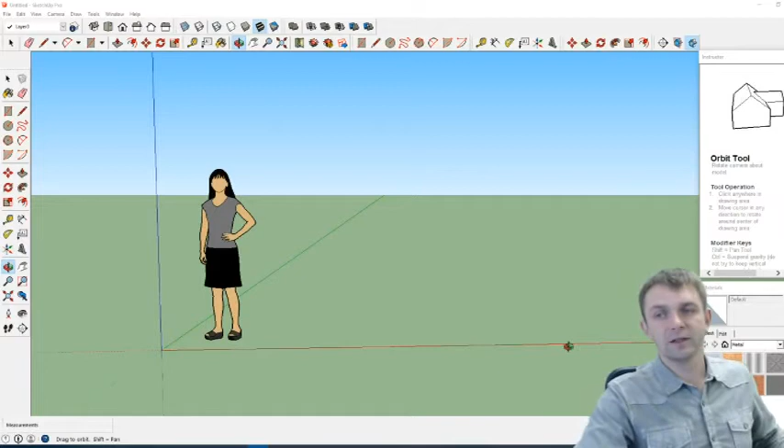So let's start by looking at my measurements, starting with the original floor plan. It's also very recommended to use shortcuts, so you can prepare those in your SketchUp file, but I can do it all manually too.

What I'm using right now is the orbit tool, which gives me the ability to turn the space around, and it's located right here. Now if I want to draw a line, I just press L and it gives me a little pencil. So this is 35 inches. As you see, the line appears in green, so I'm drawing on this elevation, and it's 35 inches.

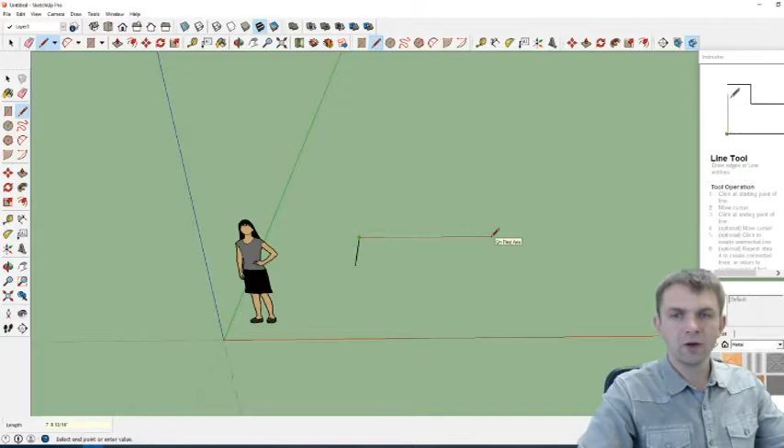Then I'm going 120 inches this way, click, and I want it in red, so you see the line appears in red. If I go up, you see it's blue, now it's green, and I want to go this way. So again, we're working in 3D space. This is 120 - sorry, this is 77. This is basically how much I have to the sides.

Then I have a 60-inch door and another 17 inches to the wall, and then we have a room going this way. I'd have to add this up, so it's 17 plus 14 plus 14 plus 14, so 59, about 66 inches, and it's a 6-inch wall.

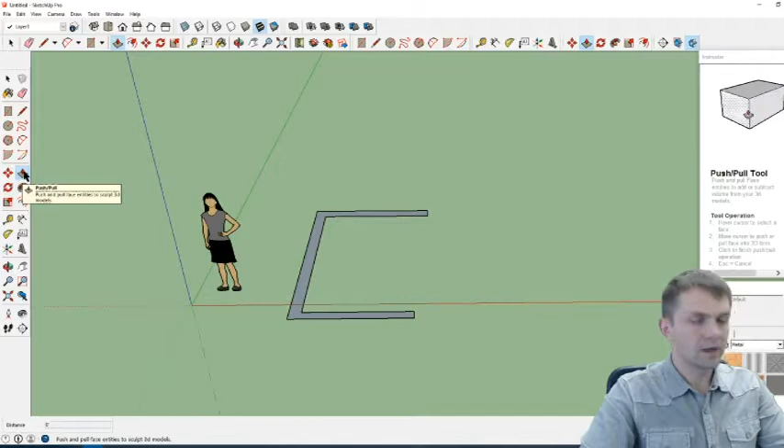Now I want to make myself a little outline here, and sometimes it'll even let you snap parallel to the area you're working in. So now this is our floor plan - it's cool. We press P for pull, which is basically this icon right here. So you go, and the height I have - my total height is 96 - so I got that.

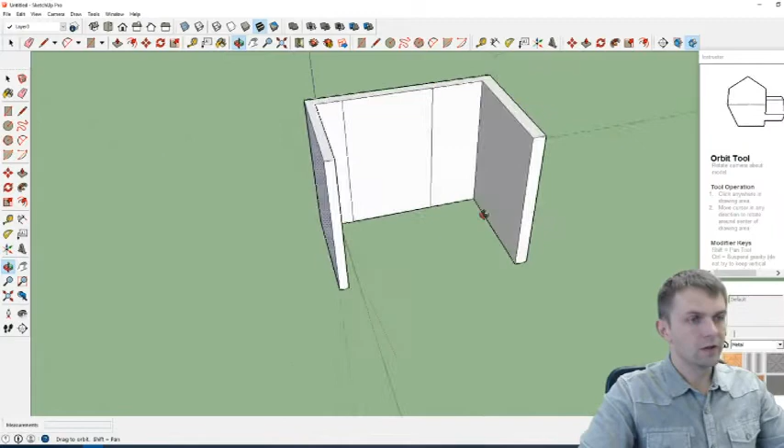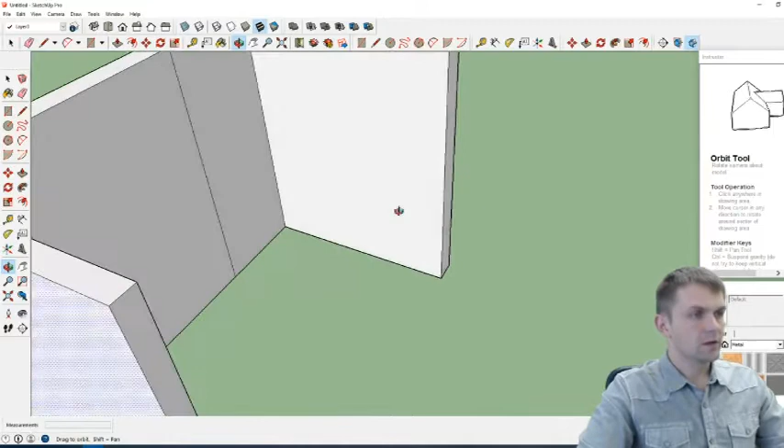So just to give you an idea of the space, basically this is what we're working with. We have the door, the bulkhead, and they want to come up with some design for this space - they want storage for shoes, jackets, and everything else. So we have the space, we have the measurements. Now there's also a bulkhead above this.

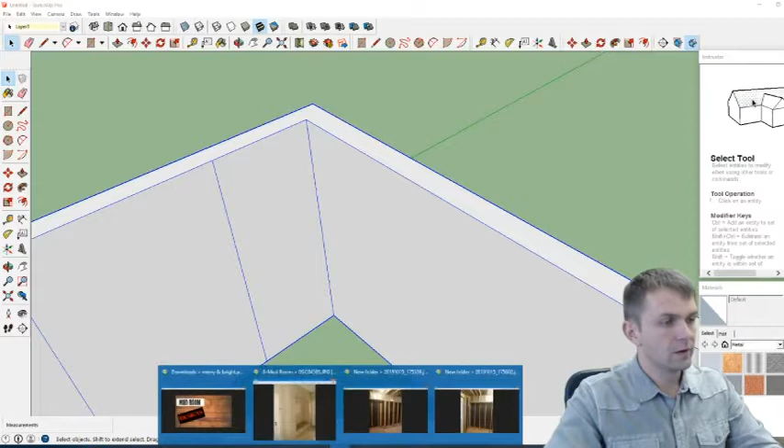What I love to do, and really recommend for everybody, is to make everything in blocks - it's much easier to modify things. So this wall is basically just continuing this way. But what we do have - if I triple click on this, right click, and make a group, now this is its own separate block, so nothing is going to happen to it. I cannot modify it, it's not going to stretch, it's basically frozen. I'm going to add a bulkhead - it's 96 minus 79, so it's a 17-inch bulkhead that we saw in the picture. So 17 inches down and 12 inches in.

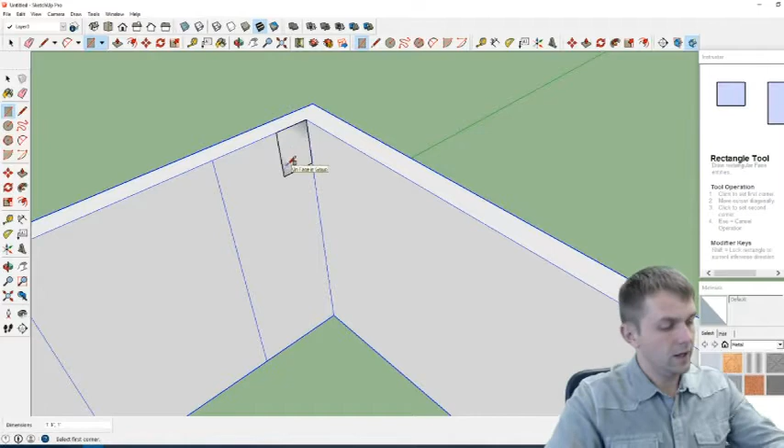So L again for line or pencil, it's 12 inches deep, 17 inches down. Now I usually like shortcuts, so I press R for rectangle and select this, and this space is full, it's 79 inches. So this bulkhead, and again I triple click, make a group. So this is my fixed block, and now I have two blocks, this and that, and this cannot be moved.

So this is where our wall ends. Basically we have the wall. This wall, the client is open to ideas, so he can extend the wall further that way, so he can cut off some of these 2x4s. He just wants a nice design and lots of storage.

So let's go back. Basically, first thing we want to do is make it look tall. If you double click on this, let's say we have an 82-inch door. So you see it gives us a green point, and then E for erase, I can erase these points. So we got our door. You could actually go in SketchUp and find all kinds of models and place a door, but for this, it's just a quick tutorial.

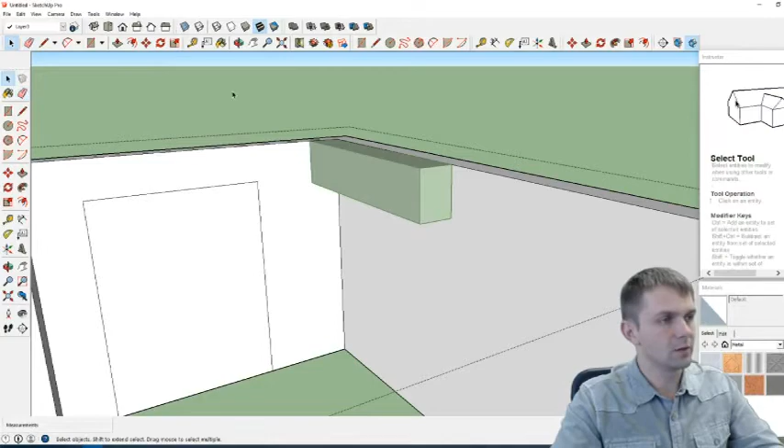We're gonna do a quick drawing of this. I'm doing a 24-inch pantry, so 24, and then it's gonna be 78 inches tall, and R for rectangle, and first, before the wall, we need a little filler, so let's do a 3-inch filler.

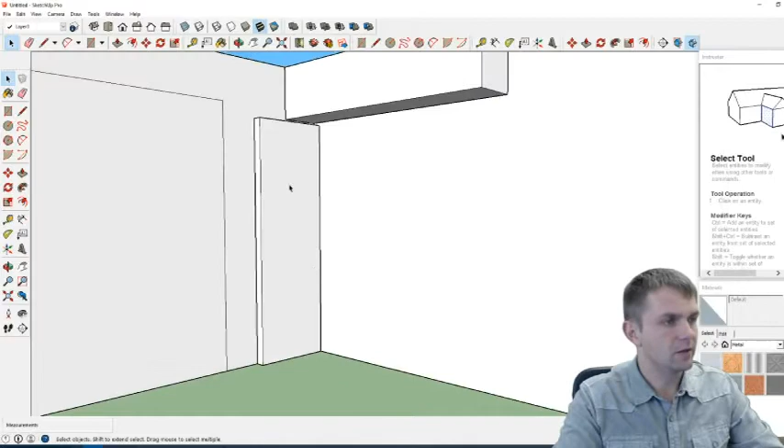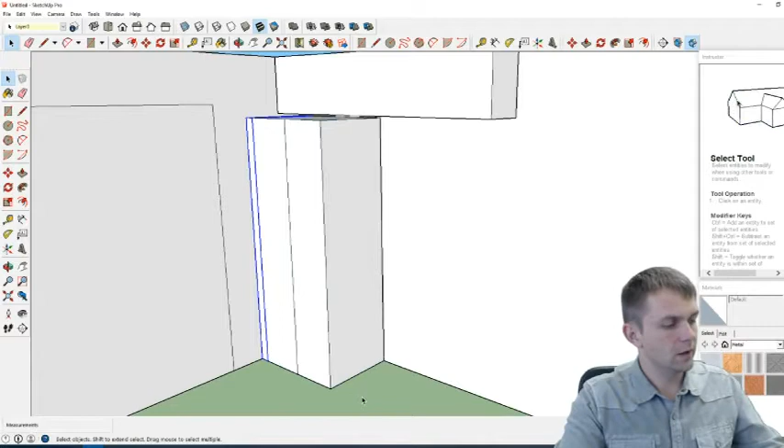So we triple click, make our group, then we go into a pantry. So I go R, so now that is its own separate thing. I go a 30-inch pantry, and we can add some, let's say we add 2 doors, and we make it a block, Control C, Control V. So I just copied that column. Now let's say we make an

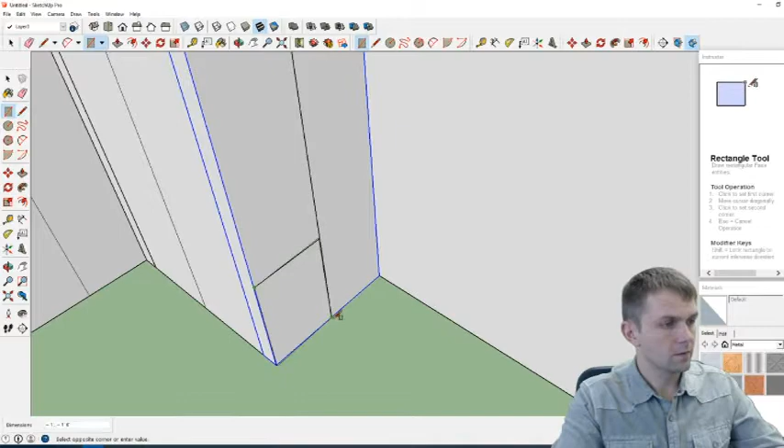16-inch bench, and then see how I can actually, O for orbit, I can see if I go straight up where the bench is gonna end. Actually I wanted to do something here. The bench is usually 18 to 22 inches tall, so it's the same as your chair pretty much. See, so something, see how there's so many lines, something is not lining up in here. So one of the lines went sideways on me, so we'll go this way, 18, and we'll go 15.

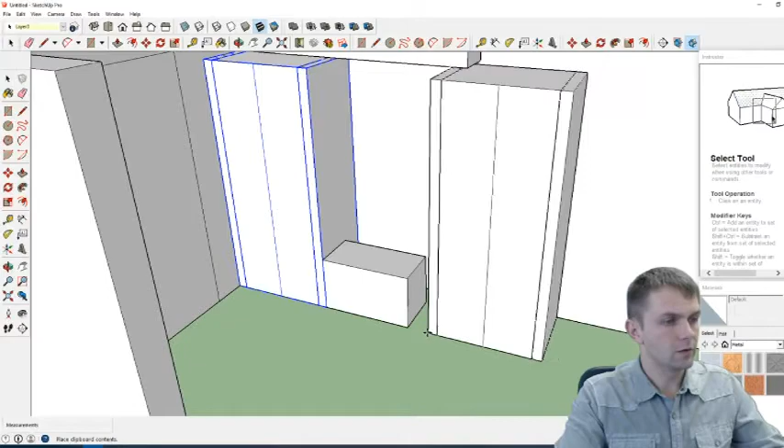Pull, and we'll make this 30. Make a group. Now we're gonna copy this whole unit, Control C, Control V, and we basically have this kind of look. Now to close this bulkhead, we can also add cabinets on top. So we'll go 2-inch, 3-inch spacer, we want to line it up. You see the blue line is giving me, again, it's giving me a horizontal, oops, Control Z to go back.

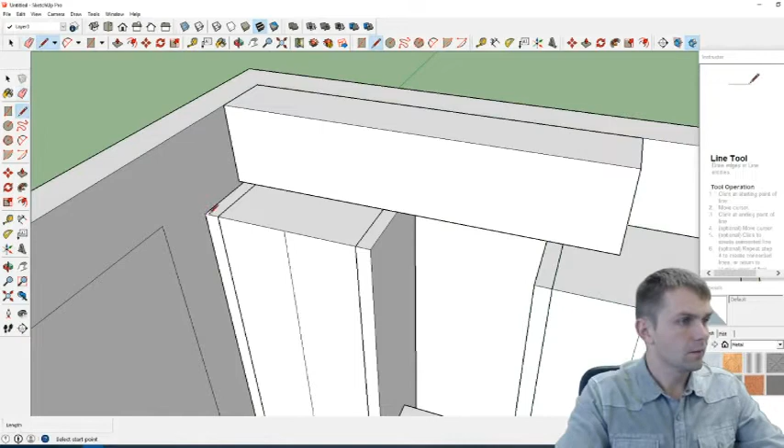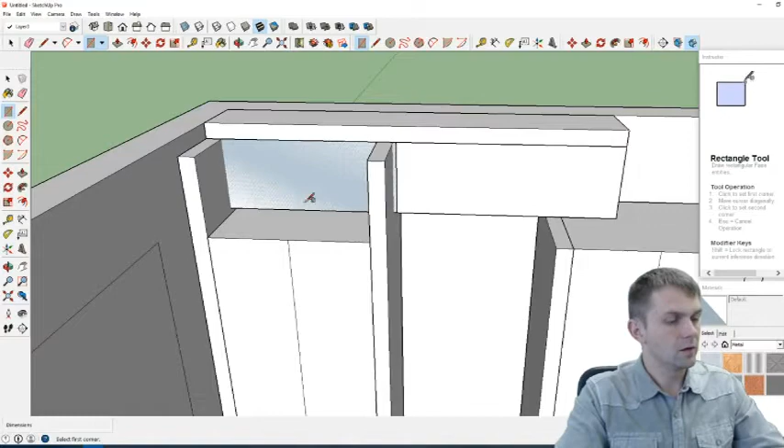A rectangle, P for pull, Control Z. Now I want to, again, these will probably, we want to extend them, so we're going to make a notch in the gable. See how when I'm modifying this, all of the other things are frozen, so P for pull, and then you select the top, and that's done. So when I click on the side, you see this is the only thing that's see here also.

So that's my bulkhead. So orbit, now I want to go from here, from this line to this line. Now have a point, so I want to go here, P for pull.

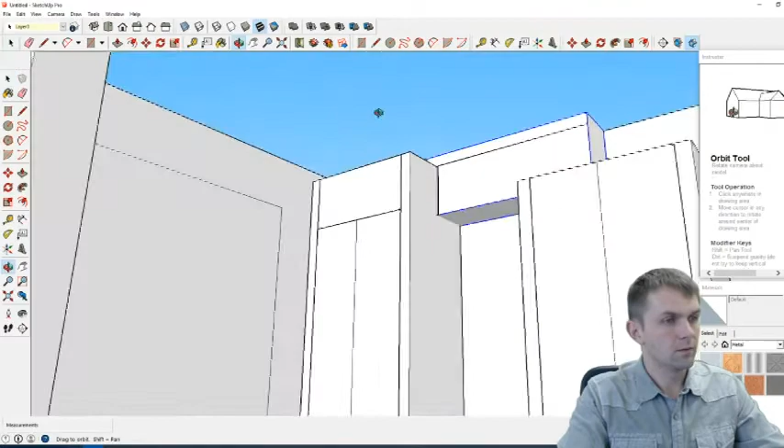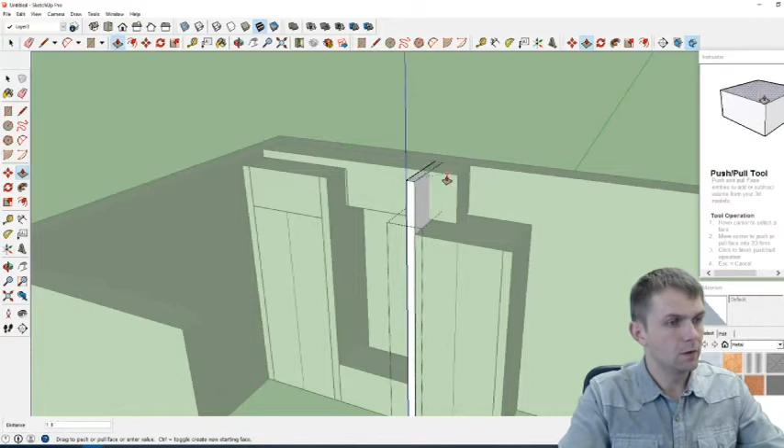Okay, make a group, P for pull, and see I'm referencing this to P for pull, so I could reference this to here or even to here. So it does the same height. Very easy to play with this software, as long as you get some practice, of course. You need to, it doesn't come just overnight, so if you practice, you become better and things become more interesting and fun.

See how I have it as a block, so it's easy to modify. I can just erase some things, and now the block changes. It's, see, the same as this. I can delete this, guys, and it's going, and that's it. Double click here. So this is our

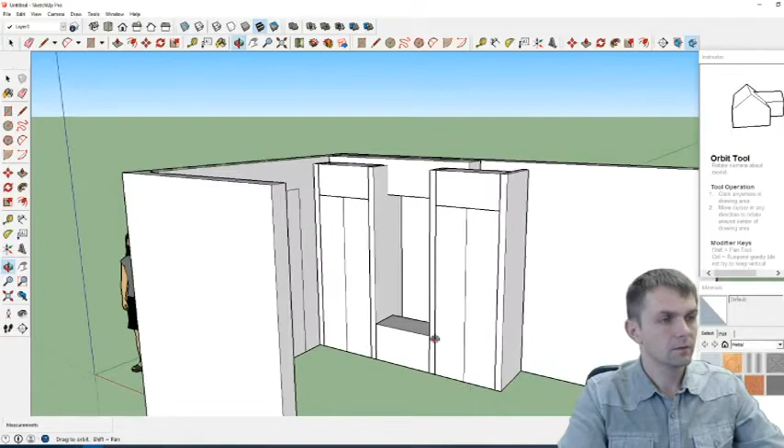look right now. Now the idea here was to not see the bulkhead. So see how the line is showing me. Now I do a rectangle and I stop here, put to, let's say, 1 inch, and then I want to do an offset, so this thing here, and you just go 3 inches. So let's say I want to do a 3-inch rail, and then I want to color this in some sort of wood, but that's after.

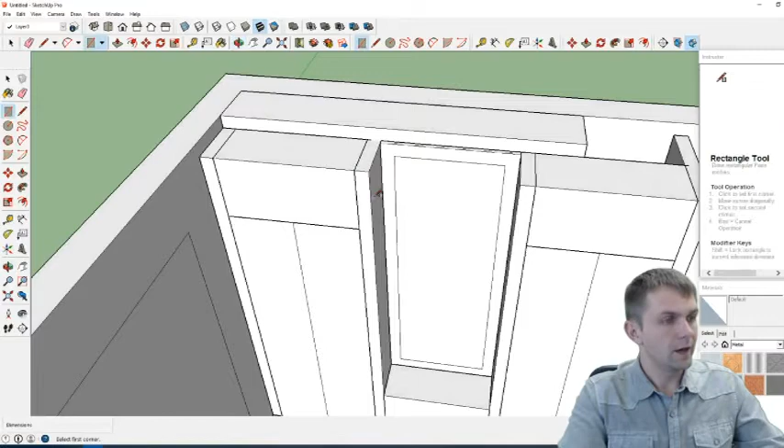So this is the idea. We're basically hiding the bulkhead with the mirror, and we're creating a bench, we're creating storage, and everything that the customer controls.

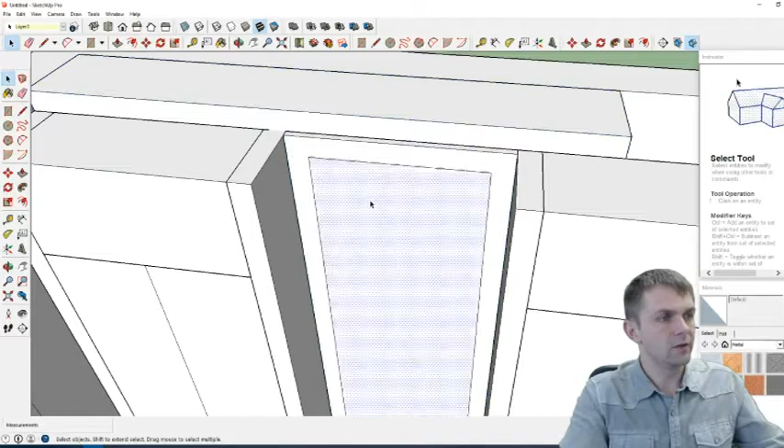I didn't want to have the mirror grouped with the other items, so I go back. R for rectangle, square, P for pull, line this up. So now this is a separate item, a separate block, and if I want to change things around later, it's easier to do it.

This is a separate block, R for rectangle, pull, P for pull, line up with this. I also want to have a line here because I want to pull these items.

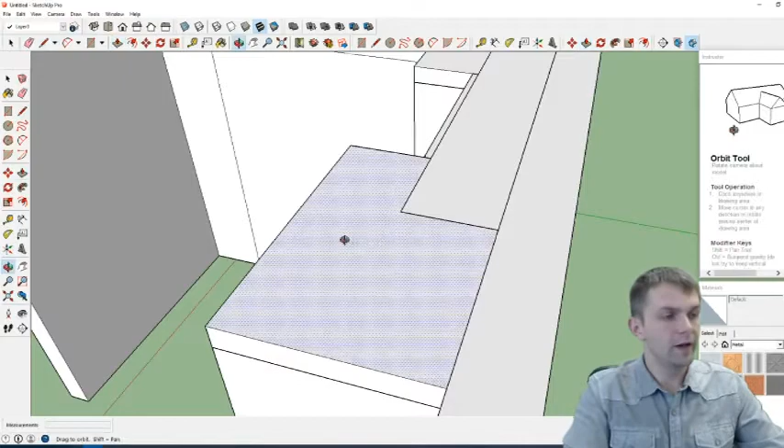Again, this is not how it's going to be manufactured, and obviously there's going to be some adjustment in production, but in general, this is to get an idea for yourself of the look, or to get a quote, or just to understand what you're doing.

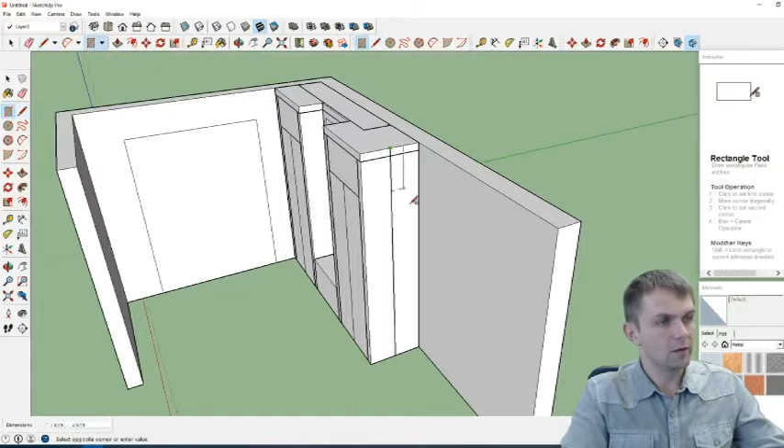They also have this bulkhead that's coming out 12 inches, so what you're going to see from this space is only that much of the pantry. The rest is basically a wall that's going this way, and somehow this wall is narrowing down like that, or even like that. So E for erase and P for pull.

Now I'm just going to get this section out and see, I can either make a block or I can unblock this, but basically that's making a group. So that's what they're seeing.

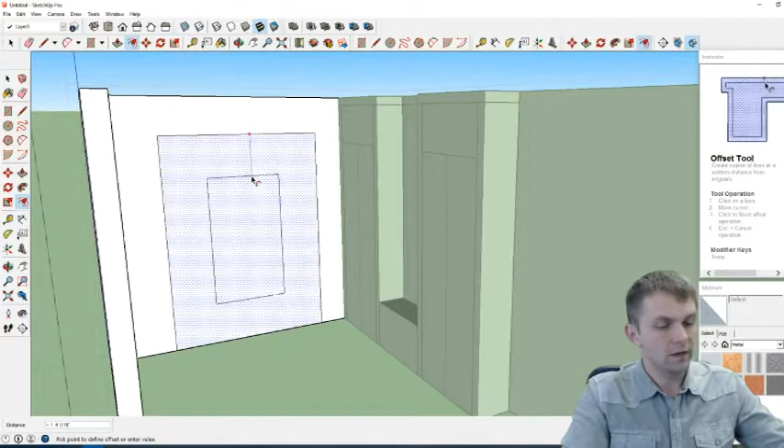So everything is nice and clean. They have their door. I can offset this—let's say you have a 4-inch casing, right? Then just L, clean this up here. E for erase, delete that, so because you're editing this space, you can actually bring out whatever your casing is. The depth is 0.75, so you can see that.

Now what they want to do on this wall is create these interesting niches, like little skinny niches with LED lights. They weren't sure how that's going to look, so again, I have to edit this wall.

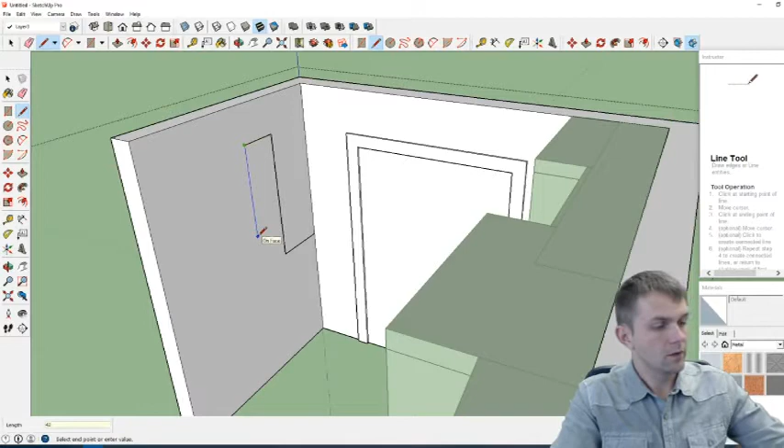So I triple click line, and it's about 42 inches tall. It's giving me a green line, 17 inches. Then it's about 42 inches tall, and it's about a foot, 42, and I go pull, and I just click the end, so you have a niche.

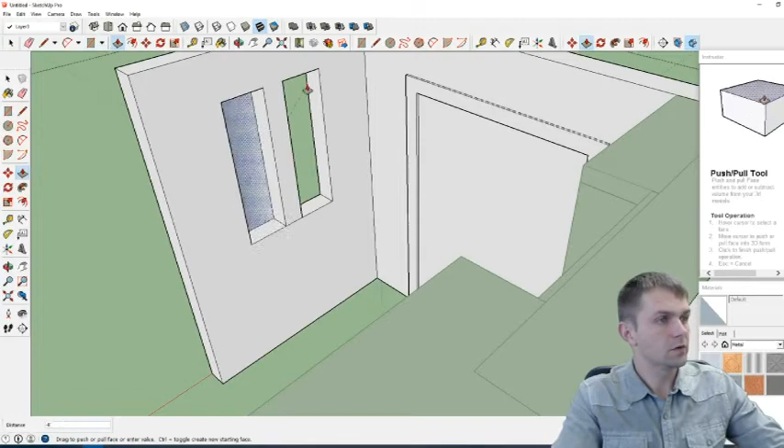E for erase, then you have about 6 inches of space, and another 42, another 12. Now R for rectangle, P for pull, and you just click at the end. So we have a second window, and now L, 6 inches, 42, 12, enter, then R and P for pull, and E for erase so we clean this up.

P for pull, I want to add a little bit to this wall. So this is their niches. That's the idea, that's the idea of a wall unit.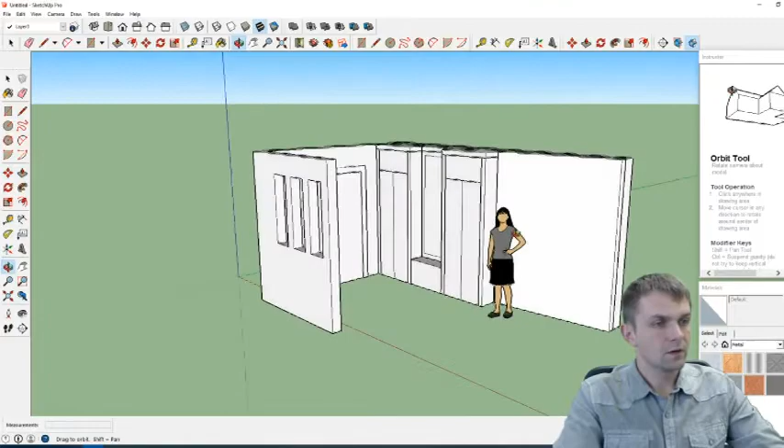They basically have a mudroom. We can select the lady and move her to see how she's in perspective to this. So they have a full mirror, and one of the options is this.

Now if we look at the inspiration image, they also have a frame on the bench, so we can add that detail as well. Triple click L, it's a 3-inch kind of top. Okay, so we have that.

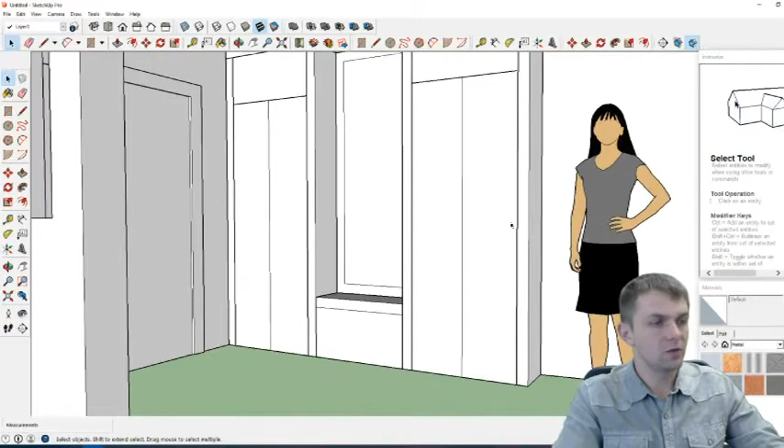So basically this is another unit we have done before, a little more traditional idea. We're not trying to repeat this design, but that's an idea of a bench if you do have a bench.

If this has wood finishing too, they're very basic, but they again give you—oops, it's actually the opposite. It's not letting me stay. Oh, yes.

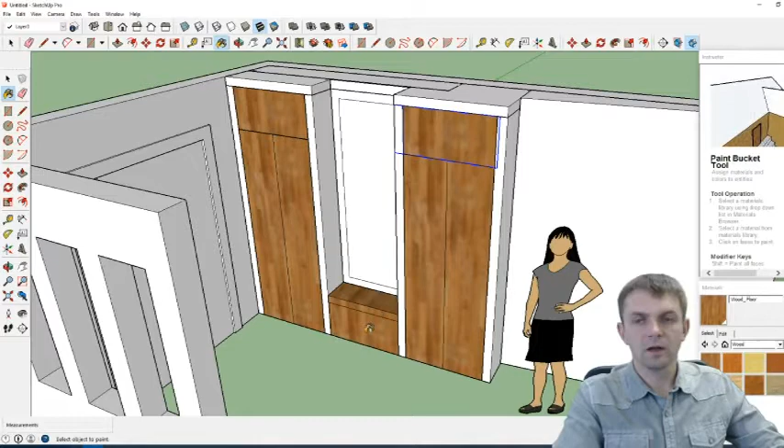See, when it's a block, it's highlighting the whole thing. So if you want, you can double click this and select, then just select the areas, but it's the opposite, sorry.

So here we have the idea: white frame, chocolate units, and then their niches and things like that.

So let's give them some measurements. Measurements you do here. So this unit is 3 feet. Now this mirror is 2 feet 6 inches, and this is 3 feet.

So shift is going to give you a hand where you can move. Orbit is going to give you this, you can go 360, but let's say you're somewhere here and you just want to shift.

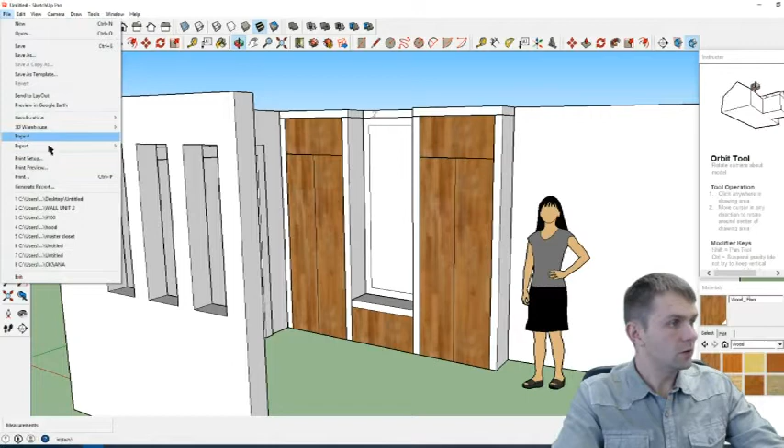So you press shift and click, and you're working in the space already in 360. That's a good angle that I want to take a picture of. So now basically, file, we go to export 2D graphics, and it's going to load us. So design 1-1, save. So if they want to look at the other angle, here they have the measurements.

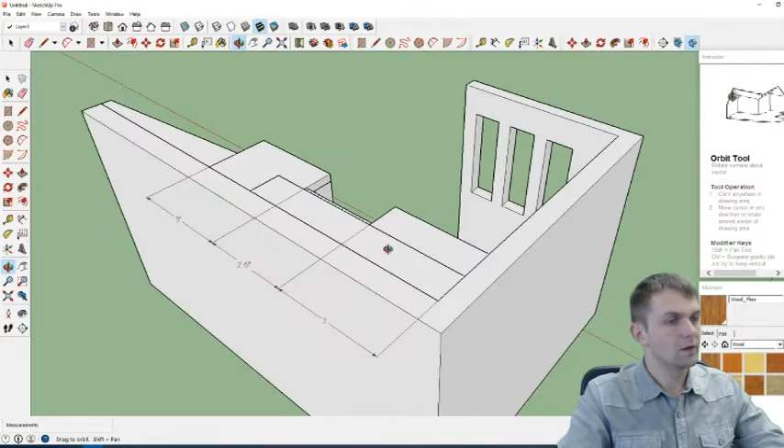I can also add some depth measurements. So this is 2 feet, so they see, and then the mirror is not letting me measure, so I just made a line. Hopefully now I can go to the line. Yeah, so that's 12-13 inches deep for the mirror.

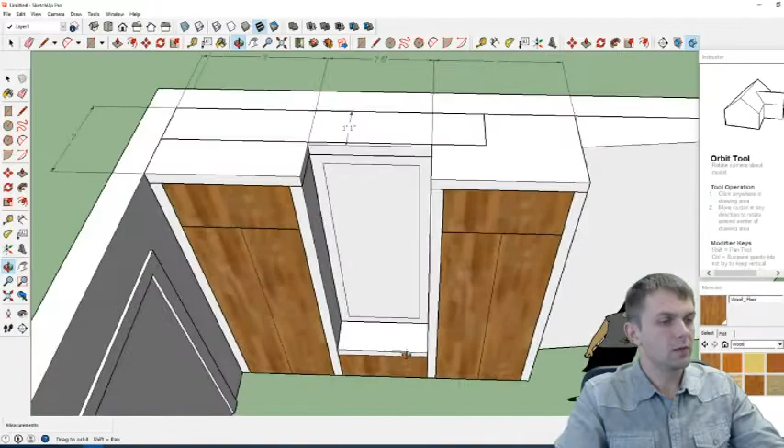Hopefully you can clear the bulkhead. We'll check all the measurements. So you have a seat, you have some upper storage.

Usually this has a kick, so double click P, and then we go 4 inches, or we'll do a 3-inch kick. P 3, and then R, make a group, Control V, so I can just copy. So there you go.

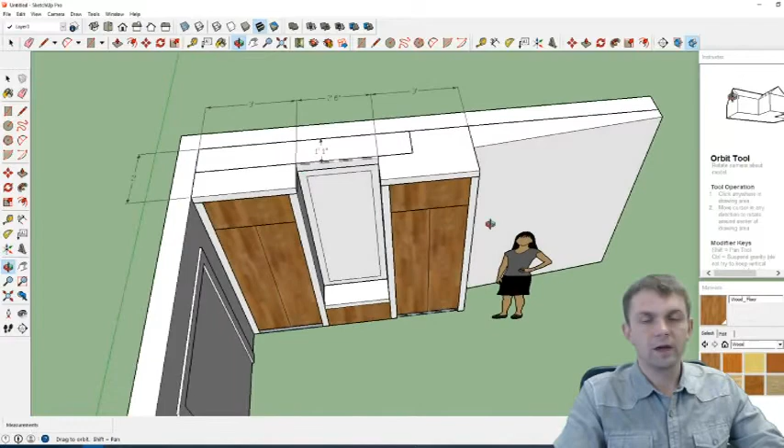So this is one of the options, one idea we can present to them, and then if you want to design it yourself, you have an idea. If you have any questions, just comment below, ask me, and I'll be happy to answer them.

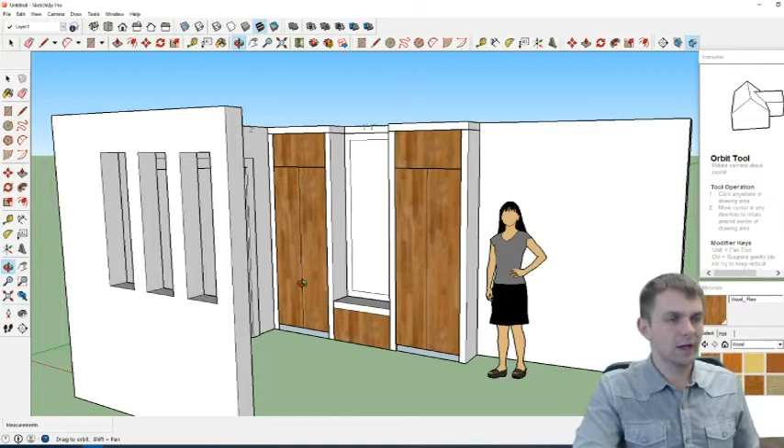This will give you a lot of storage for your mudroom. You can have on one side, for example on the left, a double hang for shorter jackets, and on the right a long hang for your long jackets. At the bottom you can have shoe storage. You can also divide this into a short hang with lots of shoe storage, and this could be a long hang. There's a lot of space right now.

One more thing I have to adjust is this cabinet pull. See, because I added a layer of paint on it, now it's creating an issue. So pull, right, it's its own. Okay, so I can just step this back a little bit, but now it won't let me shift this up.

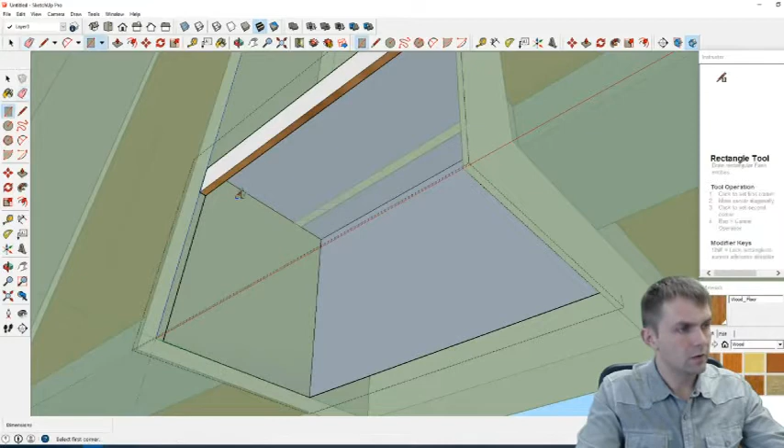So another way, oh, it'll let me shift this down, so I can erase this and just go again. P for pull to this point, and then 3 inches up. I can erase this line and exit, and make this into its own block now. So again, double click and bucket. I wanted to do it like that, and now do a separate kick plate.

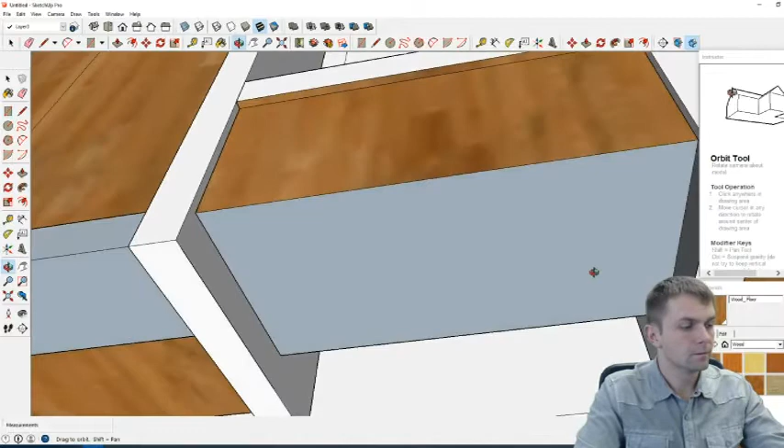For pull, and here we go, and make this a group as well. So now it all makes sense.

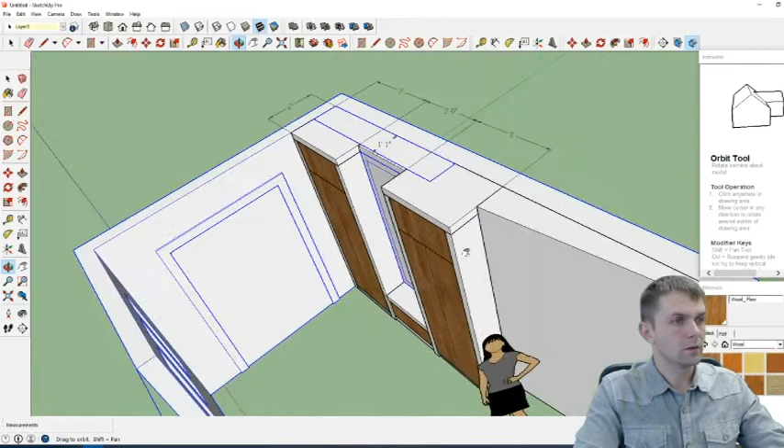So I'm going to delete this now and export to the graphics, design 1-2. Save.

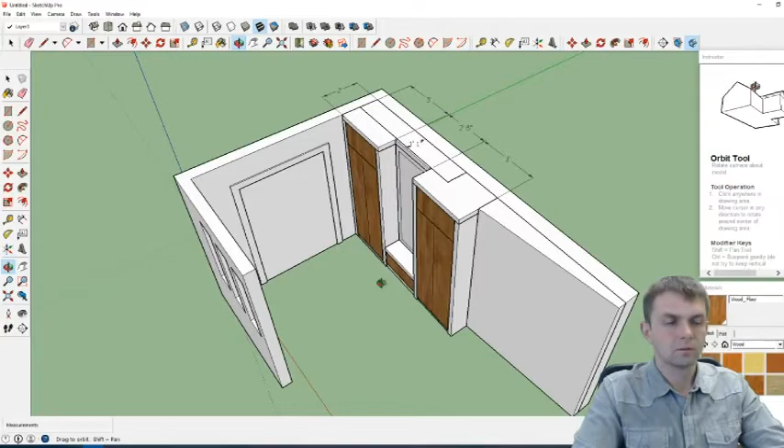Okay, now for example, if I want to create a different design, I just go Control C, copy, Control V, and now I want to move this bench. I want to put it here, so you select this. See, it's for some reason selecting.

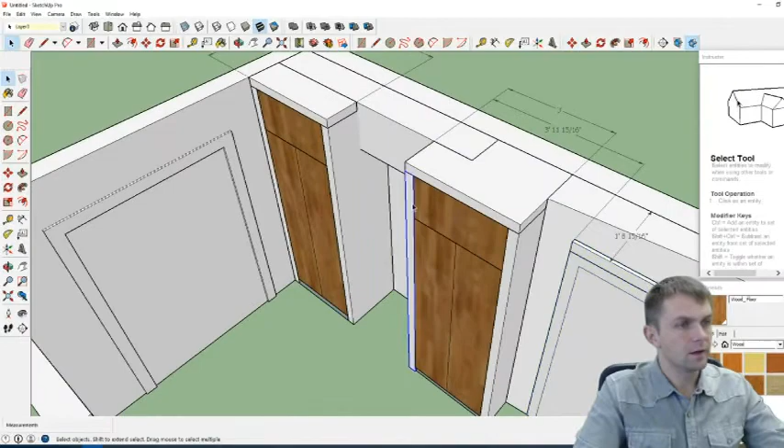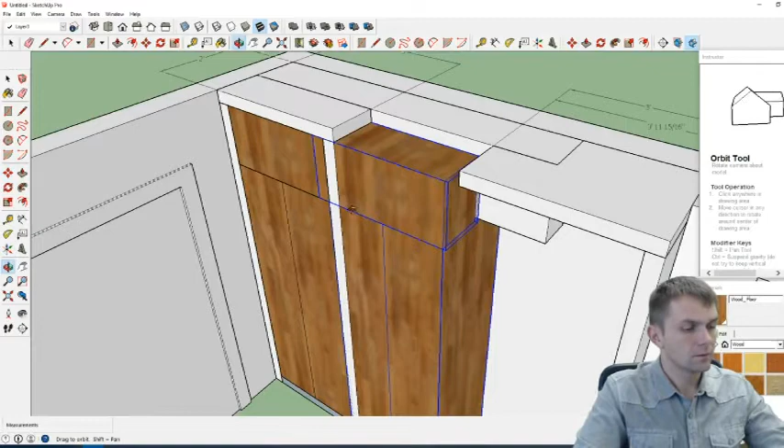Okay, so I move that. I'm going to also move this aside, and I'm going to delete one of the posts, and let's say this unit orbit, and I hold control when I want to select all of them, and I just move them here. So the two units are here.

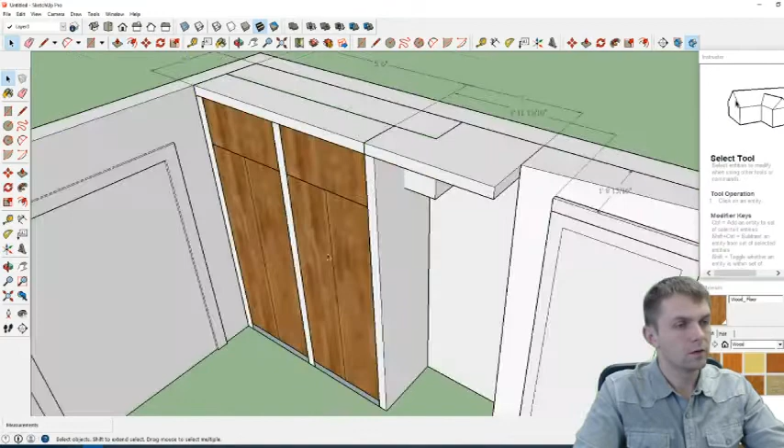So you have to think which side you're going to grab this from. Double click P for pull. So this is a little bit of a different layout. Move, so this one I want to just mount it right on top of here.

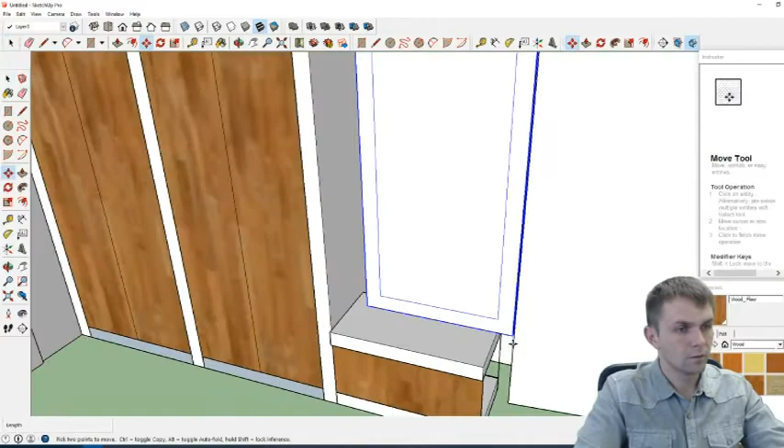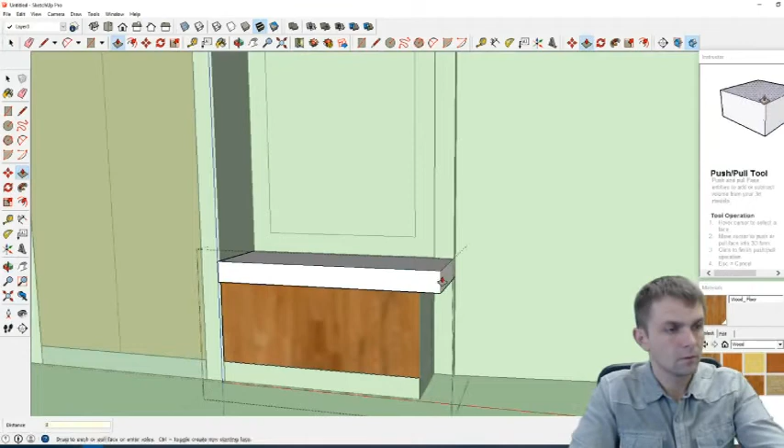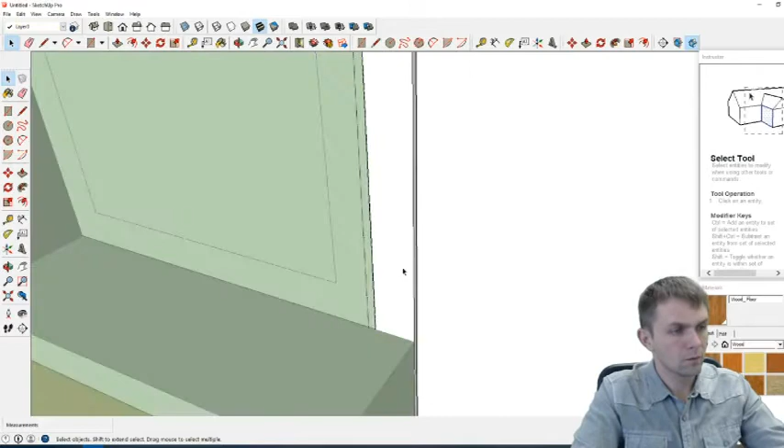Well, because, yeah, that's right, because we got rid of the post, so now it's 3 inches more. Our mirror is off center a little bit, so we go back 3 inches, just like that. So this is our second option.

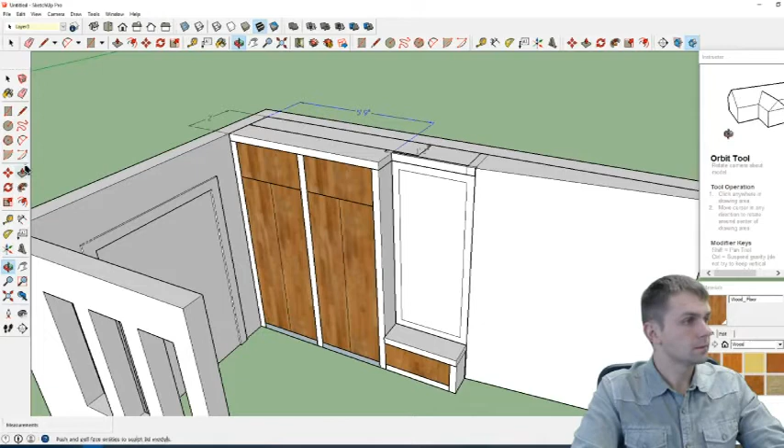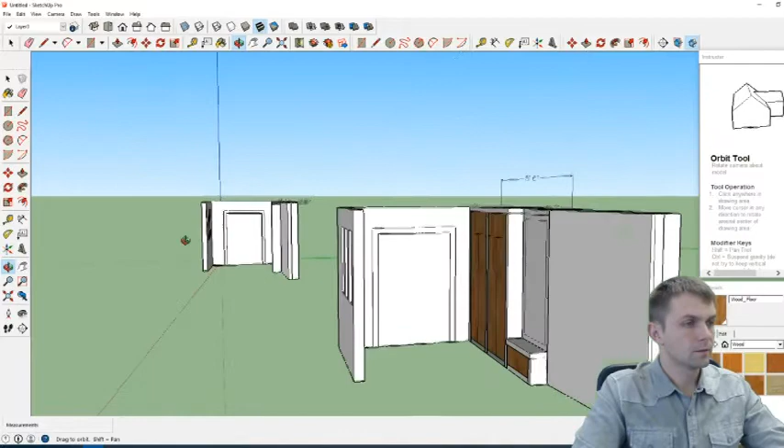We can delete these measurements. Export 2D graphic. This is going to be design 2-1, two, this is... there's 3.

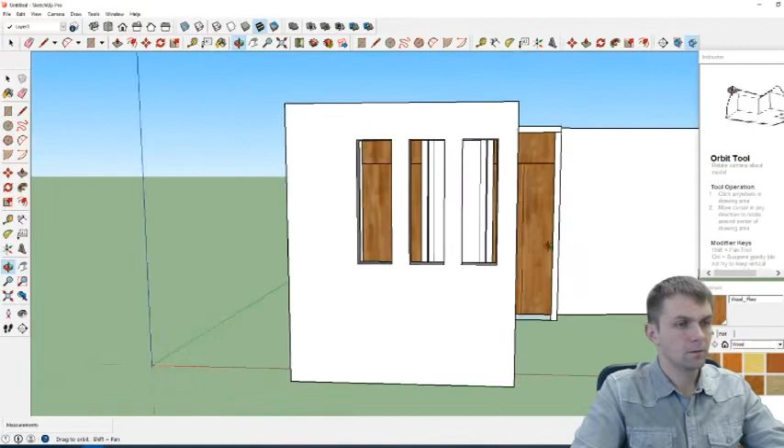Okay, so there you go. So there's 2 options for your mudroom design, and again, you can play with this as long as you want, but it's very important to understand what you need to put in the mudroom, how you're working with it, how many kids do you have, how many backpacks, how many lunch boxes, how much stuff is coming back to the house and being placed right here in your landing or on your tiles. This is not going to look nice when you just have a big mass of shoes all over the place, and jackets.

So the mudroom is very, very important, and you have to think it through. When you have a layout, you have an idea of the shelving and the spacing, so you can plan things out and say, okay, the boots are going here, the shoes are going here, the kids are going there, and here we go.

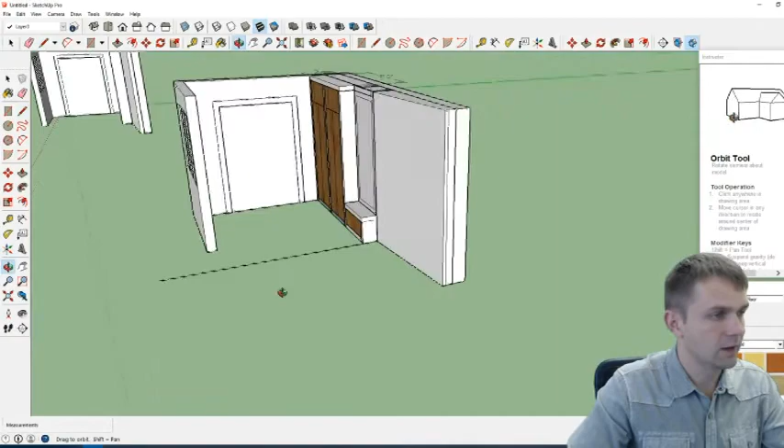So a few other things that I forgot that are important: the tile area. For example, if we want to end the unit in here, as you see it's giving me a green light. So either we go past this, or a line here, and I'm going to tile this area. I would suggest to tile, since I like things lining up.

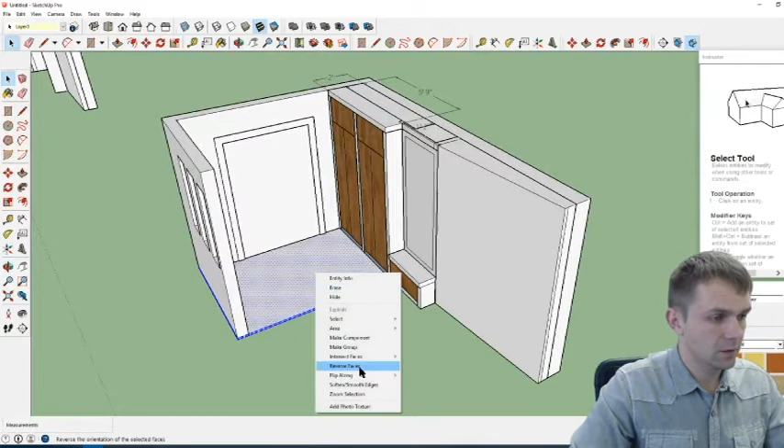The customer was thinking to just keep it all in this kind of area, but I think it's a little too small for the space and the amount of people they have. So I can pull it down an inch, and basically double-triple click, make a group, and set the material to stone—some sort of tile they're going to do in here.

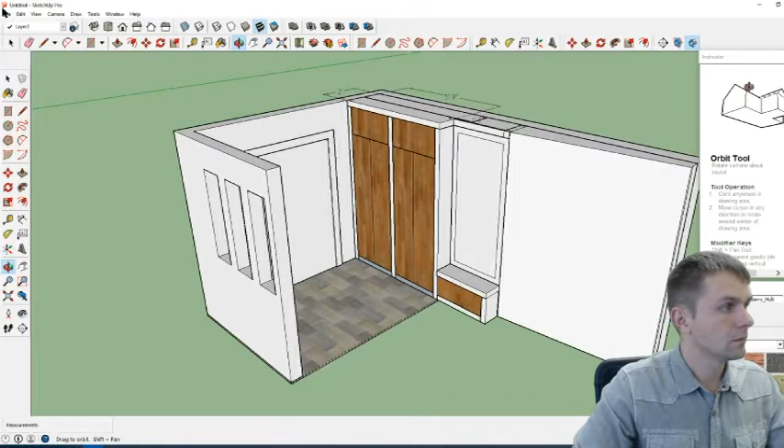So export 2D graphics. This is going to be design 2-3.

Okay, so we're going with the tile. This is how that's going to look as well. Not the best look, because they just want the tile in that area.

Export 2D graphics, design 2-4. Oh, this is design 1.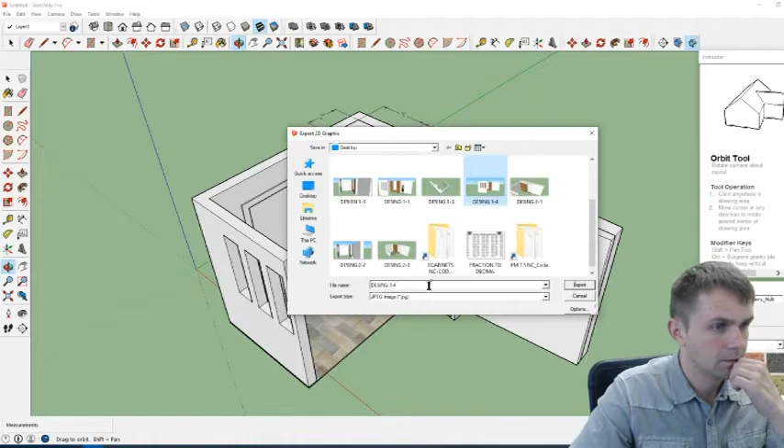Basically, if they want to keep everything on the tile, it's only 60 inches. We have to control-copy this, control-V. So this is very—I can hide this.

See how when you have blocks, how easy it is to modify and create a different option. Now we go edit, unhide all.

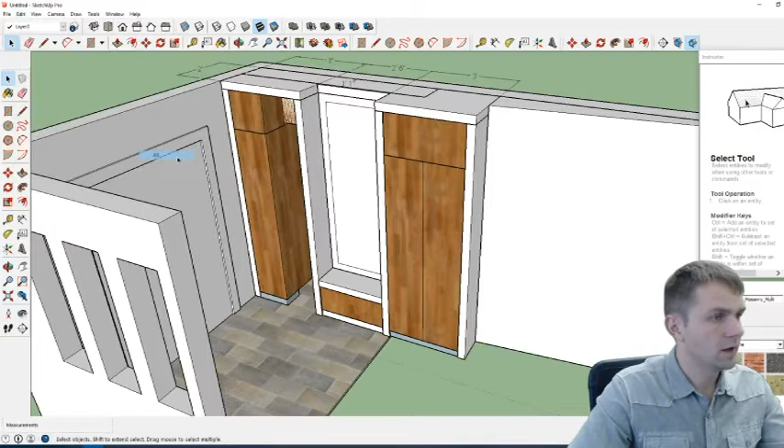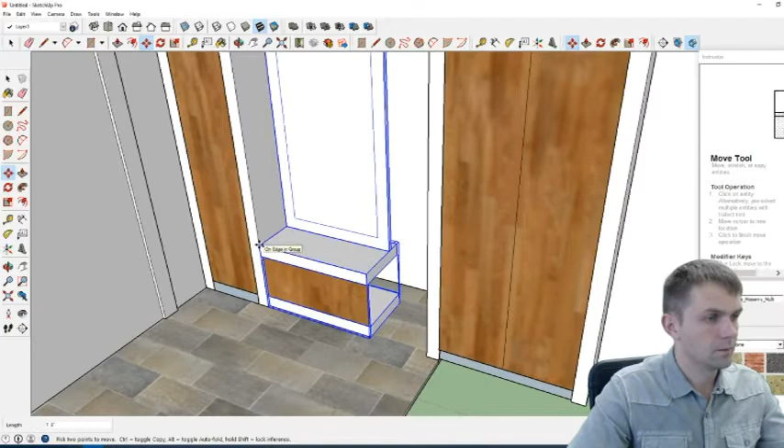P for pull—so now we have that. The whole middle section we just move, and then we copy this section into here, and get rid of this whole thing.

And basically they don't have to extend the wall anymore, or they just leave it the way it was.

There you go, so this is option number 3. I'm going to erase 1 foot 9 inches—basically this is 1 foot.

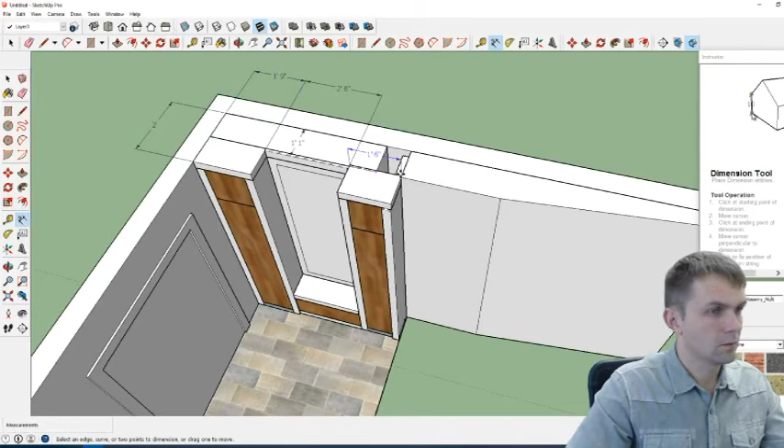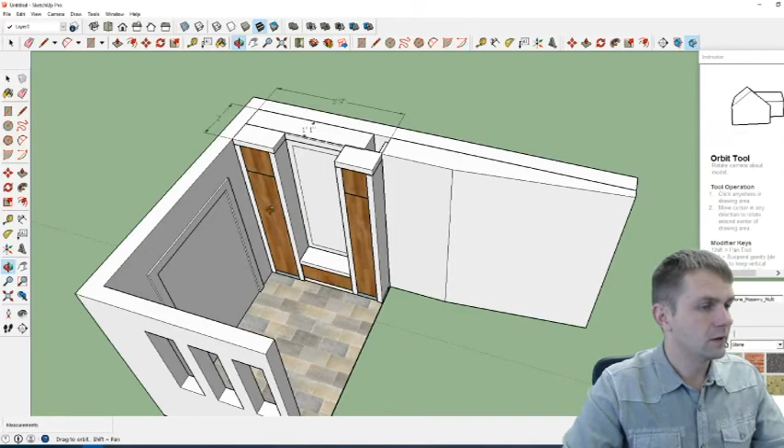Okay, so the overall size right now is 5 foot 9 inches, and it's lining up with the tiles. So if they like this option, that's another—they do have very little storage, a big mirror, and it's not as nice as the other option, but it does line up with the tiles.

So it's very personal preference. Design 3-1.

And file, export, design 3-2.

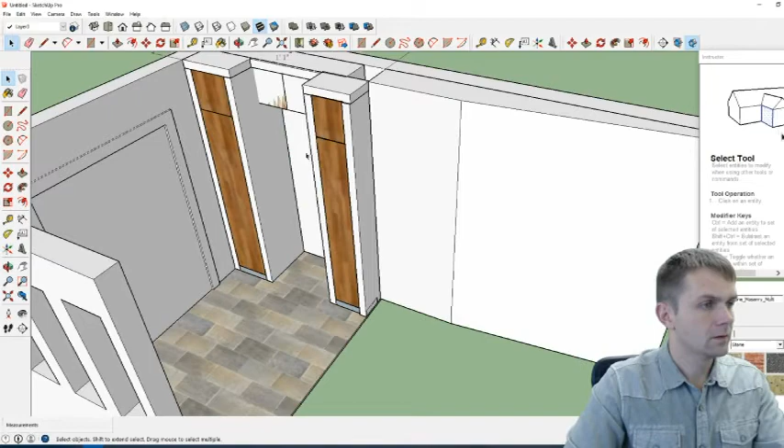Okay, and then one more, since they do need the storage, is actually to get rid of the bench—well, kind of like I did before. Actually no, it's this design here. The only thing is we don't have a bench. What we have is just a big mirror.

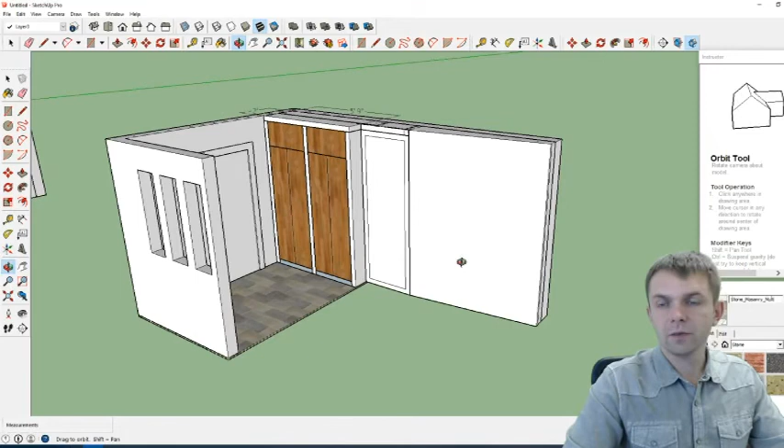Offset 3, erase, and done. So see, we just have a big mirror, 2 pantries, and a big mirror, and that's it. And this mirror could actually open up, and behind could be storage for shoes. I know the ladies have a lot of shoes.

I don't have a lot of shoes. I'm not a big fan of shoes, but the ladies have the shoes they need.

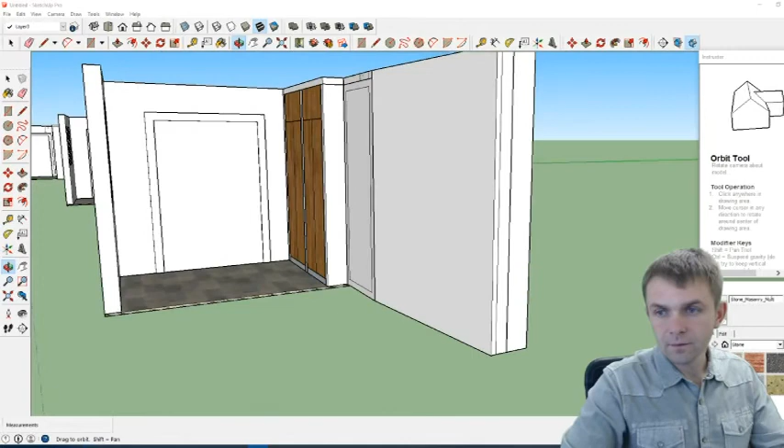Now if you want to add some notes and things like that, here you have. So here I'm going to specify for the client, or we could add shoe storage behind.

Export 2D graphics, this is design 4-2. Okay, and it's done. So there you go.